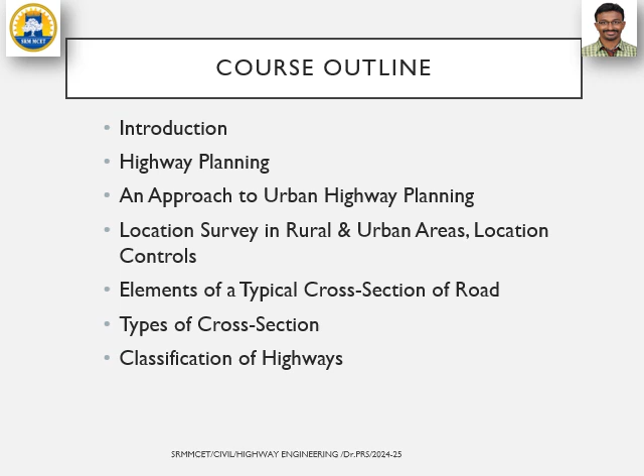In this section, we are going to discuss the introduction to highway engineering. The points we will cover are: introduction, highway planning and approaches to urban highway planning, location survey in rural and urban areas, location control, elements of typical cross-section of roads, types of cross-sections, and classification of highways.

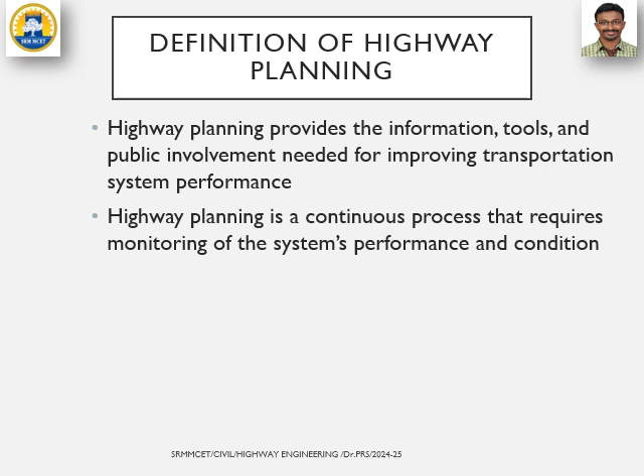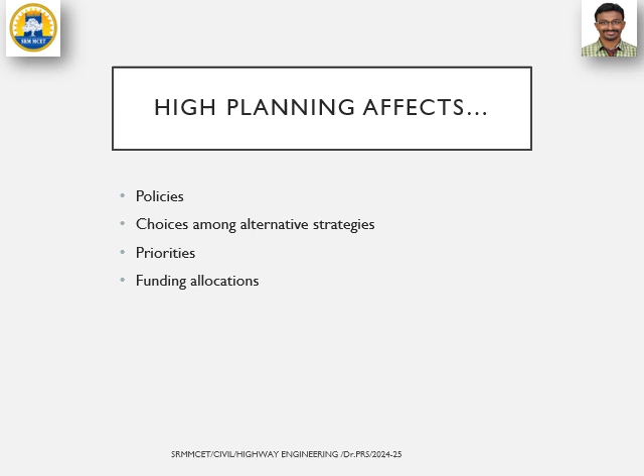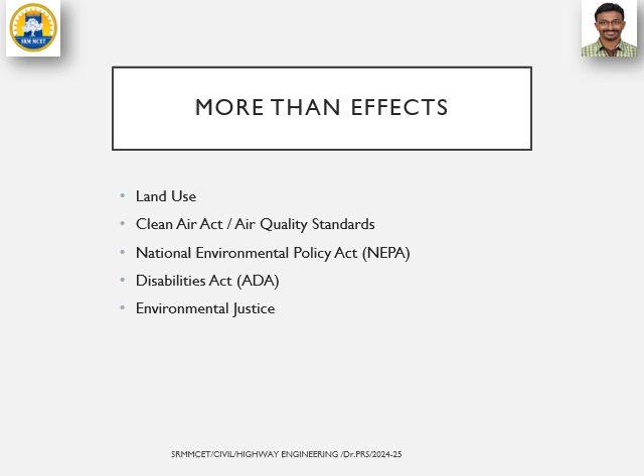Highway planning provides the information, tools and public involvement needed for improving transportation system performance. It is also a continuous process requiring monitoring of system performance and conditions. Highway planning affects policies, choice among alternative strategies, priorities, and funding allocations. It also affects land uses, air quality standards, National Environmental Policy Acts, Disability Acts, and environmental justice.

The types of plans are: long range, strategic, project and facilities, implementations, improvement, comprehensive site, and country wide plans.

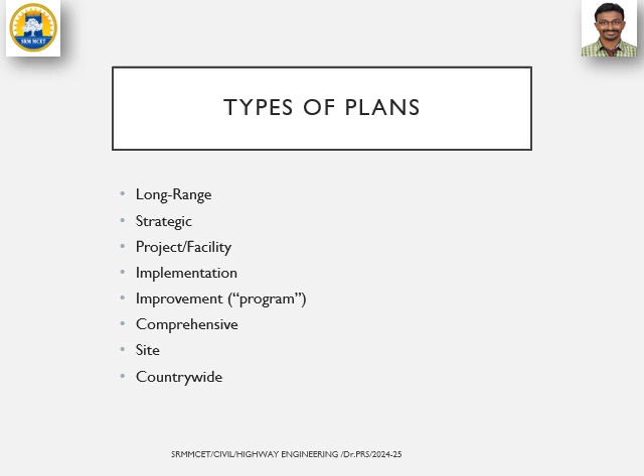Highway planning process involves 6 steps: identification of goals, generation of alternative methods of accomplishing these objectives, determination of impact of different alternatives, evaluation of different alternatives, selection of one alternative, and implementation.

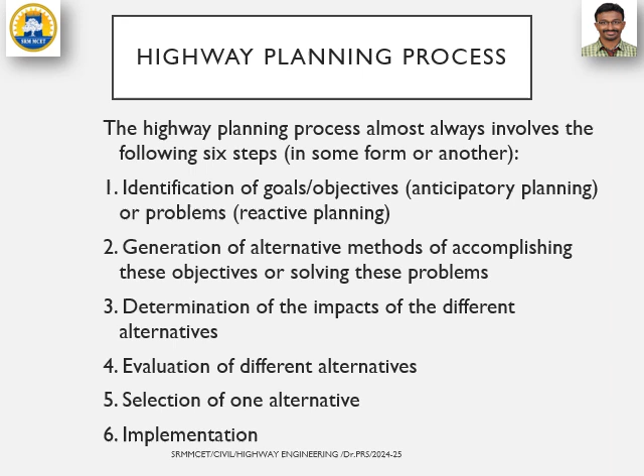What is highway engineering? Highway engineering is a subdiscipline of civil engineering which deals with the application of technology and scientific principles to the planning, functional design, operation and management of facilities for any mode of transportation, in order to provide safe, rapid, comfortable, convenient, economical and environmentally compatible movement of people and goods.

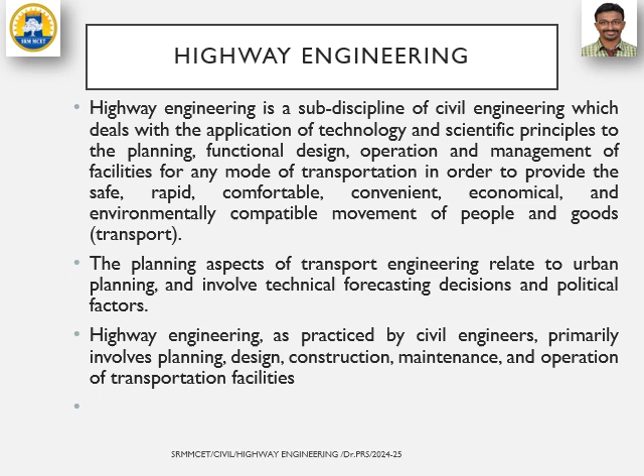The planning aspects of transport engineering are related to urban planning and involve technical forecasting, decisions and political factors. Highway engineering as practiced by civil engineers primarily involves planning, design, construction, maintenance and operation of transportation facilities.

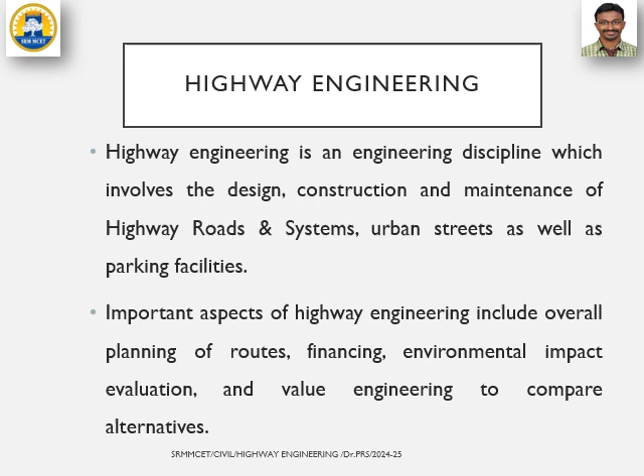Highway engineering is a discipline which involves design, construction, maintenance of roads and systems, urban streets as well as parking facilities. Important aspects of highway engineering include overall planning of routes, financing, environmental impact evaluation, and value engineering to compare alternatives.

Transportation networks are divided into 3 parts: land transportation, water transportation and air transportation. In land transportation: roadway, railways, pipelines. In water transportation: inland waterways and overseas waterways. In air transportation: domestic airways and international airways. Domestic airways is a public undertaking and international airways may be private airlines.

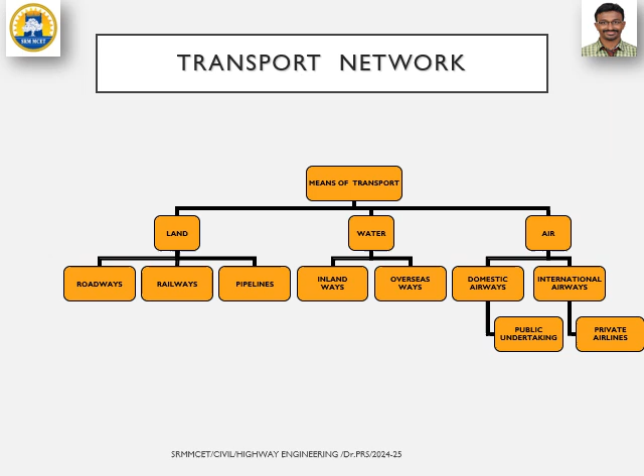The role of transportation network in the development of countries: it is the lifeline of the country, turning local markets into national markets, helping in the development of the economy, national integration of the country, and cultural integration.

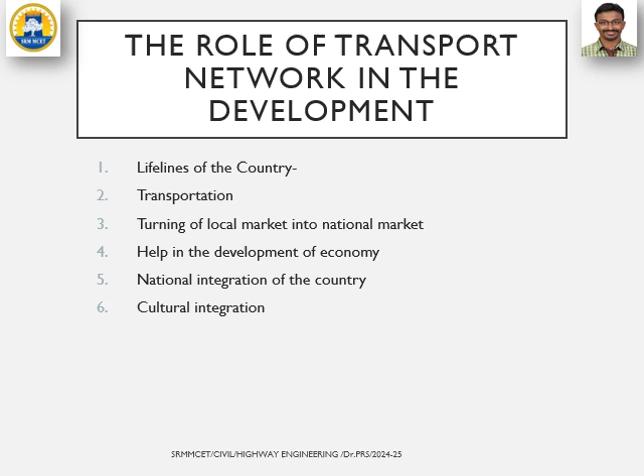Highway engineering, definition again: the application of technology and scientific principles to the planning and functional design, operation, management of roads, streets, highways, their networks, their terminals, abutting lands, and relationship with other modes of transportation.

The areas covered by highway engineering include planning of streets and highways, geometric design of road facilities, traffic operations and controls, traffic safety, and maintenance of road facilities and controls.

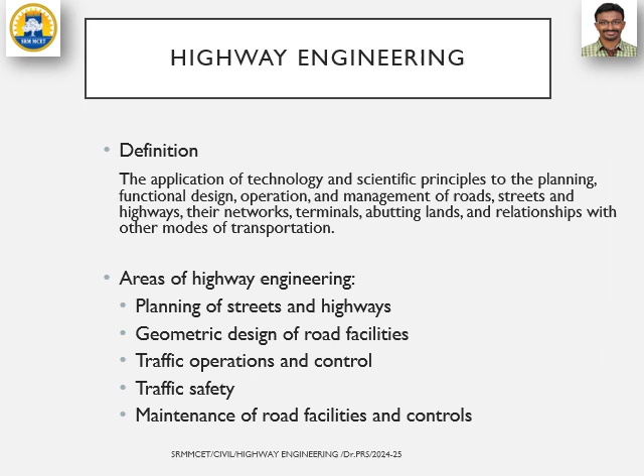What is the history of road construction? The first road is the Roman road construction. This figure shows the basic cross section of Roman road construction.

The first layer of the road is the bottom of the trench, where the Romans put a big layer of stones. The second layer is broken stones, pebbles and cement and sand to make a firm base. The third layer is cement mixed with broken tiles. The fourth layer is pavement stone forming the surface of the road, cut so they fit together tightly, with side curbstones at the edges of the paving stones, making a channel for water runoff.

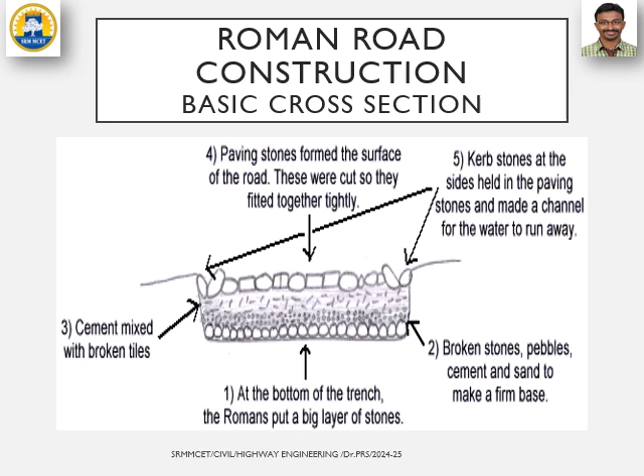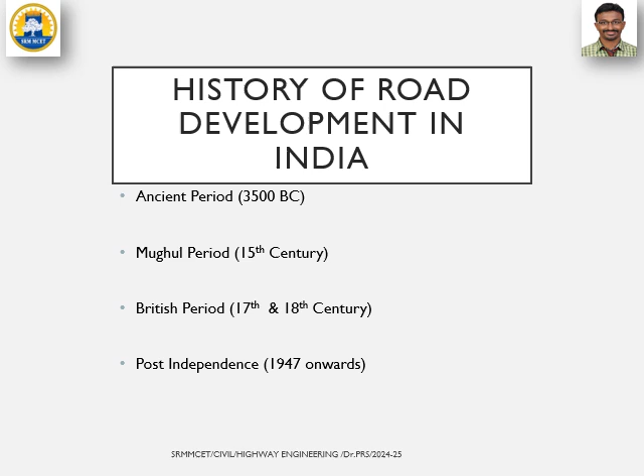The history of road development in India includes the ancient period, Mughal period, British period and post-independence. The ancient period is 3500 BC, Mughal period is the 15th century, British period is 17th to 18th century, and post-independence is 1947.

Types of ancient Indian roadways: the Indus Valley Civilization had roadways with brick drains on both sides. The Mauryan Empire in the 4th century constructed Rajpath and Banikpaths. In the Ashoka regime period, the road network had horticulture and rest houses at 4.8 to 6.4 kilometers along the roads.

In the Mughal period, trunk roads connected the northwest to the eastern part and also linked the coastal and central parts of India. In the British period, trunk roads and bridges were built, PWD was formed, and grand trunk roads were constructed. This shows the types of development of roads.

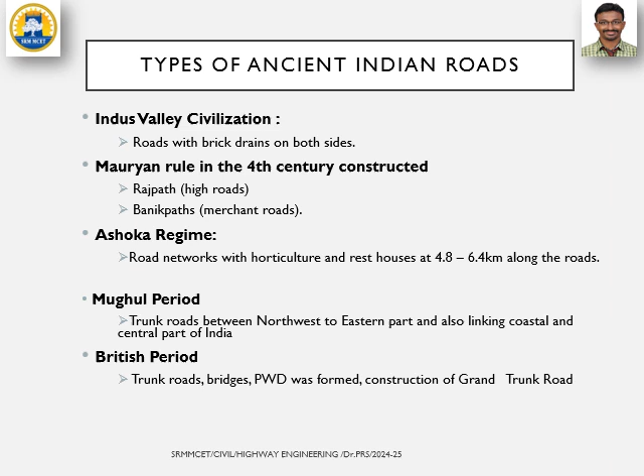The impact of transportation includes economic development, social development, spatial development, cultural development and political development.

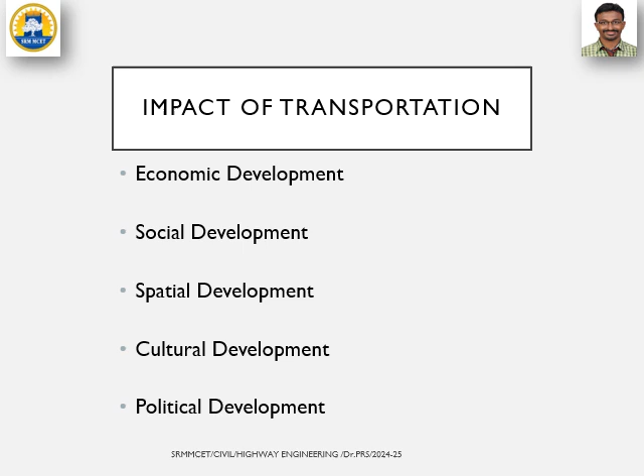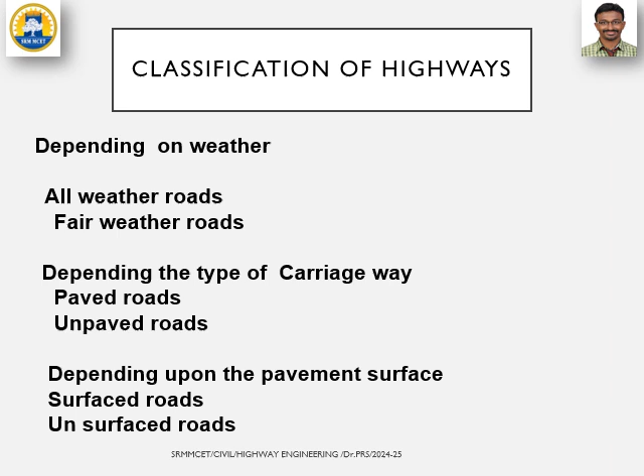Classification of highways depends on whether they are all-weather roads or fair-weather roads, and depending on carriageways, paved roads or unpaved roads, and depending on pavement surface, surfaced roads or unsurfaced roads.

Classification based on traffic volume: heavy, medium, light. Based on load and tonnage: class 1, class 2, and class A, B as per the ton. Also based on location and function.

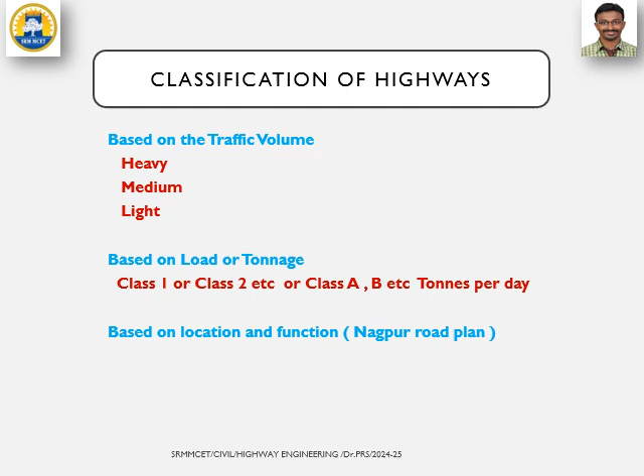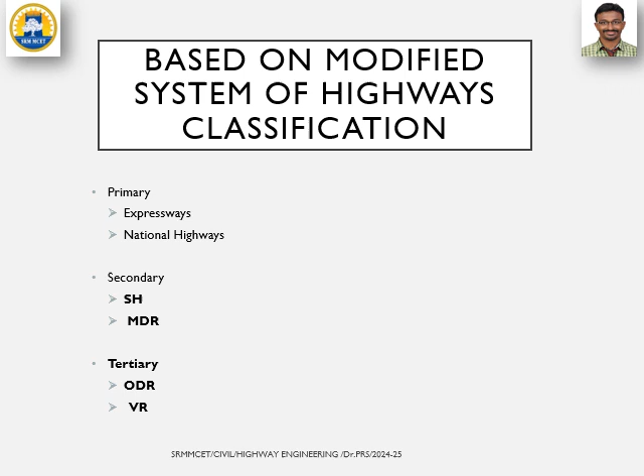The modified system of highway classification includes expressway, national highway, secondary state highway and district roads, tertiary district roads, and VR roads.

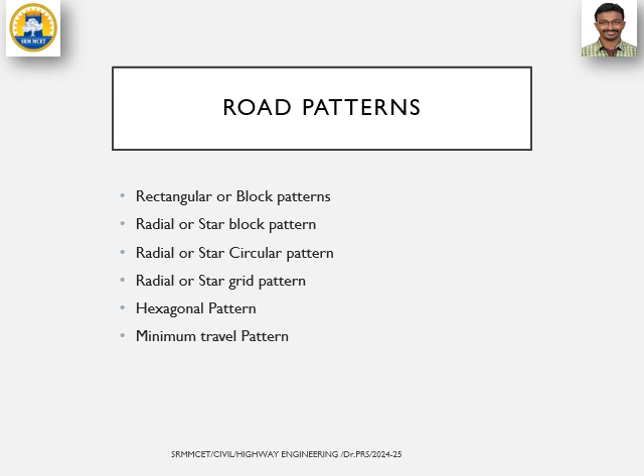What are the patterns used in India? Rectangular or block pattern, radial or star block pattern, radial or star circular pattern, radial or star grid pattern, hexagonal pattern, and minimum travel pattern.

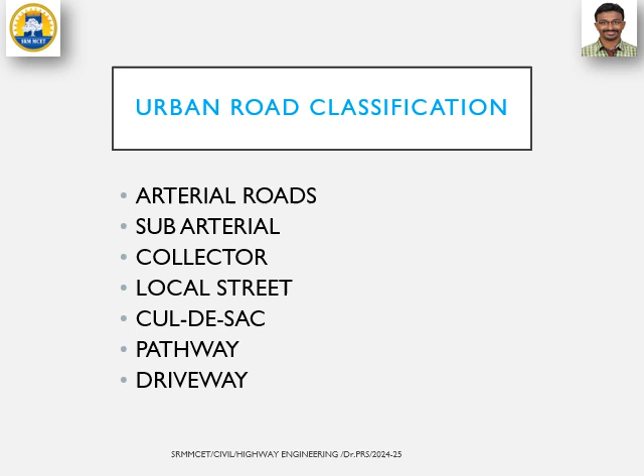The urban road classifications are arterial road, subarterial road, collector road, local street, cul-de-sac, pathway and driveway.

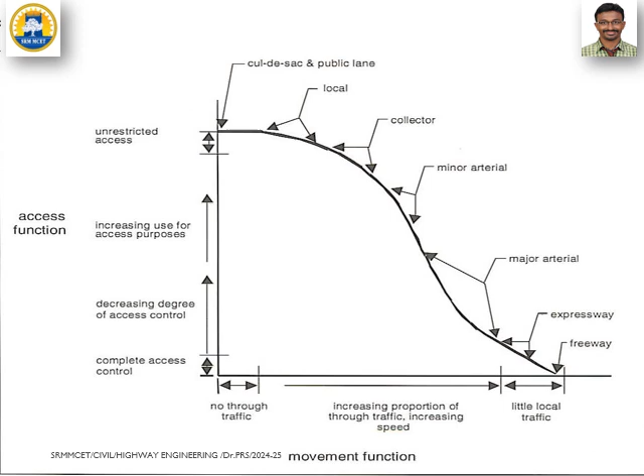Expressways and motorways carry heavy traffic at high speed, 120 km per hour, with land width of 90 meters, full access control, and they connect major points of traffic generation, connecting districts or states. No slow moving traffic is allowed, and no loading, unloading or parking except at dedicated places.

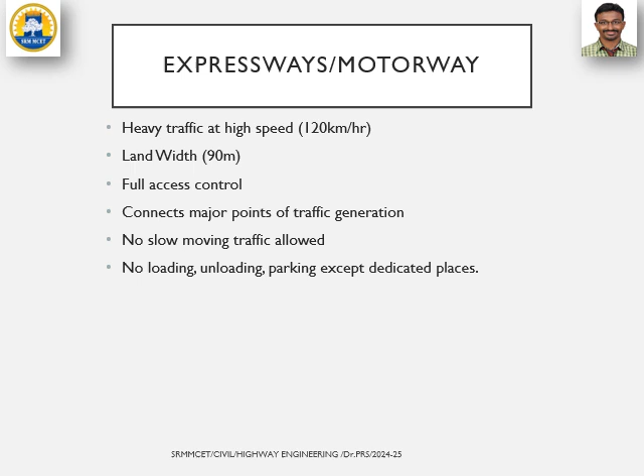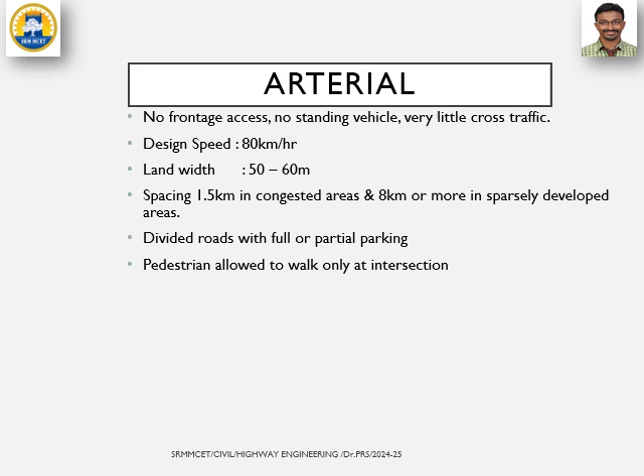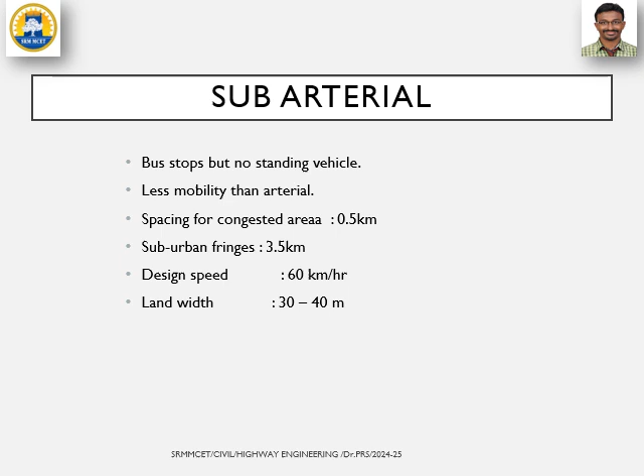Subarterial roads have bus stops but no standing vehicles, with less mobility than arterial roads. Spacing for congested areas is 0.5 km, and for suburban fringes 3.5 km. Design speed is 60 km per hour, land width 30 to 40 meters. Collector streets collect and distribute traffic from local streets.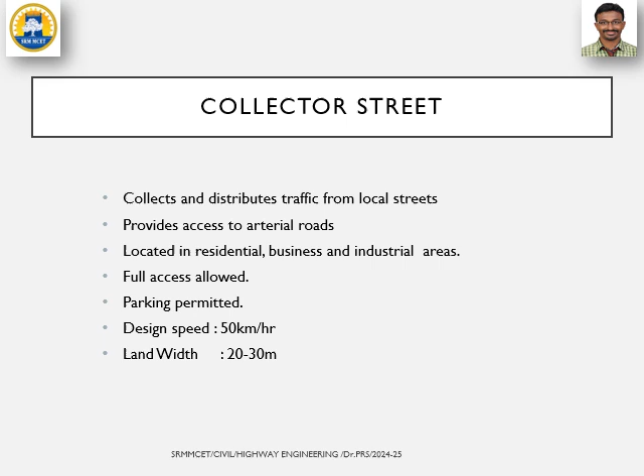Collector streets provide access to arterial roads located in residential, business and industrial areas. Full access is allowed, parking is permitted, design speed is 50 km per hour, and land width is 20 to 30 meters.

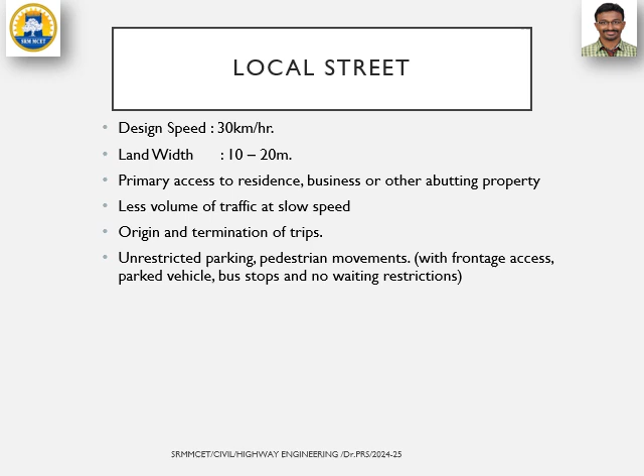Local streets have design speed of 30 km per hour and land width of 10 to 20 meters. They provide primary access to residences, businesses and other abutting properties, with less volume of traffic at slow speed, and represent origin and termination of trips. Unrestricted parking and pedestrian movement occur with frontage access, parked vehicles, bus stops and no waiting restrictions.

Cul-de-sac is a dead end road with only one entry and exit access, recommended in residential areas only.

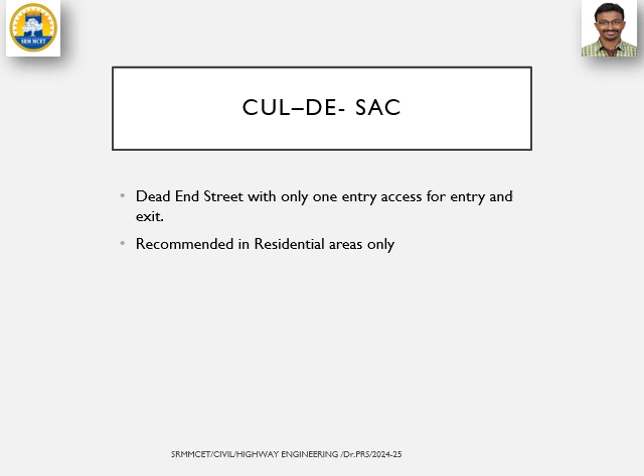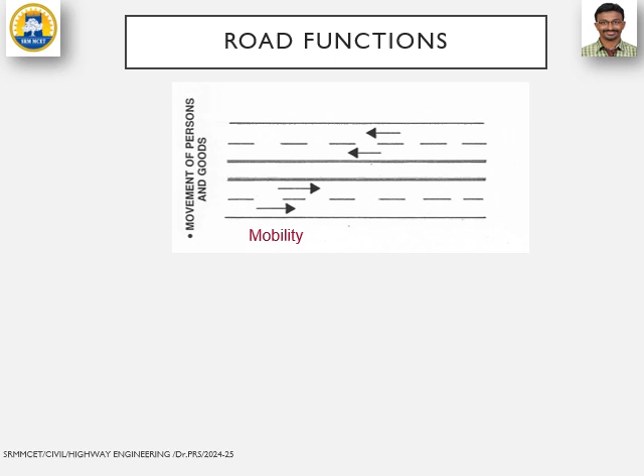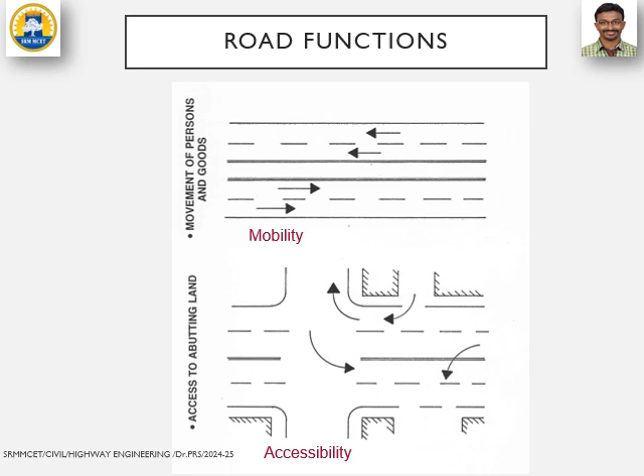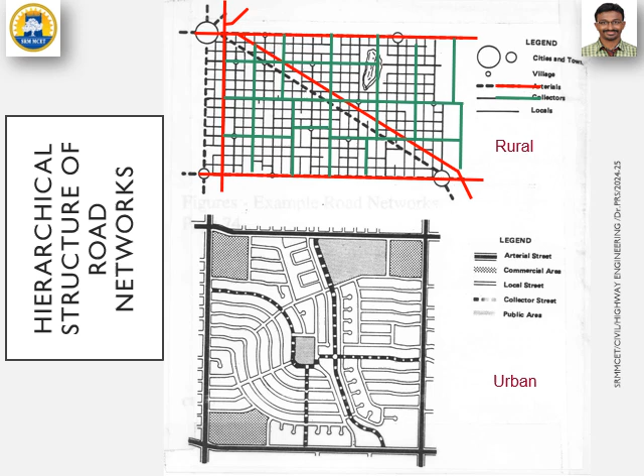In the lower diagram for urban roads, the dotted line is the main line and the dark line is the arterial road, connecting the overall area. This is subdivided into commercial areas, with local streets shown as double lines, dotted lines as collector roads, and dark shaded lines as public areas. The cross pattern represents commercial area.

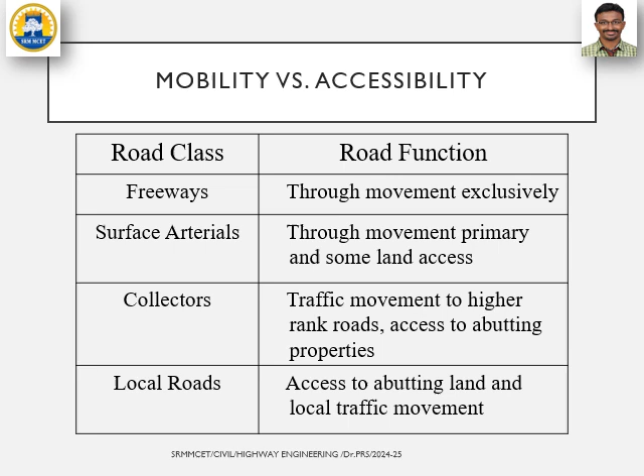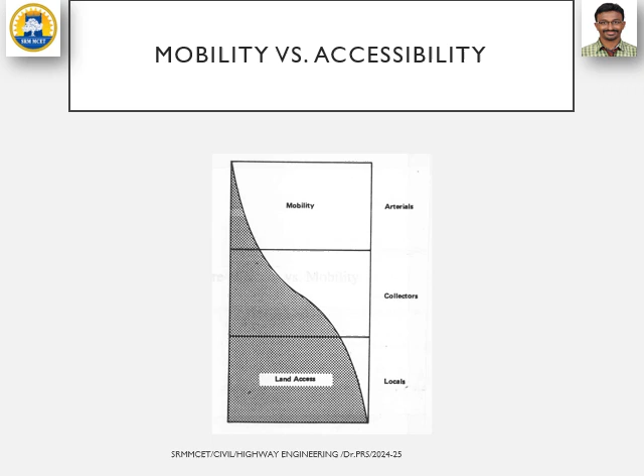Here is mobility and accessibility, showing land access versus mobility. Arterial roads have mobility as the major point, collector roads have somewhat less with 50% access, and local roads have only a very small amount of access.

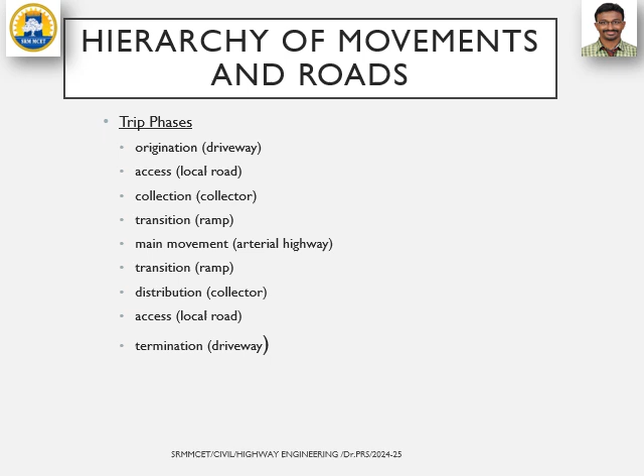The hierarchy of movements and roads has trip phases: origination through driveway and local roads for access; the collector road for collection, with transition via ramp; and the main movement on arterial highways, with transition by ramp, distribution by collector, access by local roads, and termination.

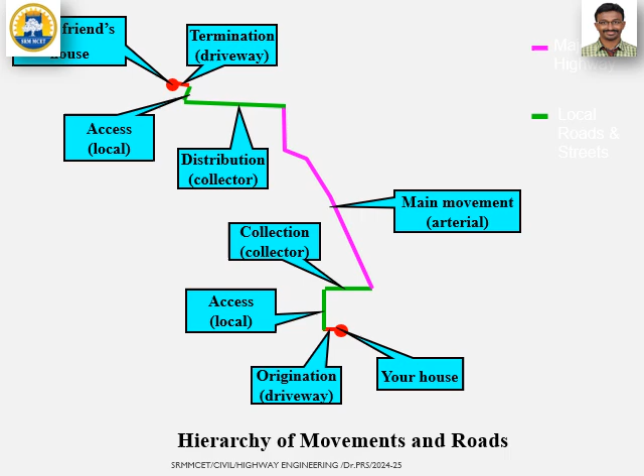The factors influencing highway alignment and planning require the route to be short, easy, safe and economical. The factors controlling alignment include obligatory points through which the alignment must pass, such as bridge sites, intermediate towns, and mountain passes.

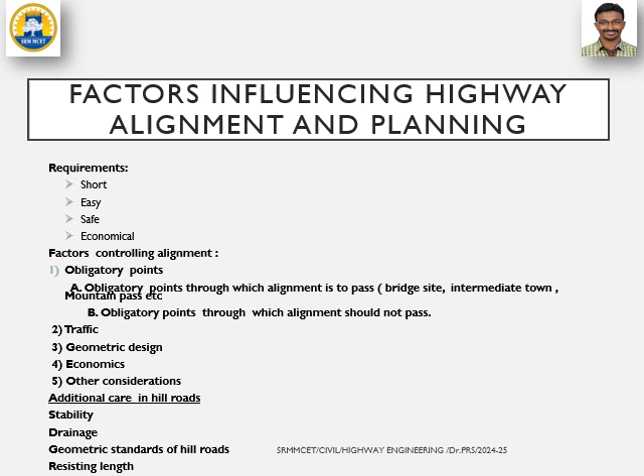There are also obligatory points through which the alignment should not pass, due to traffic and geometric design, economic and other considerations. Additional care in hill roads involves stability, drainage, geometric standards of hill roads, and resisting length. These are the factors influencing highway alignment and planning. Thank you.